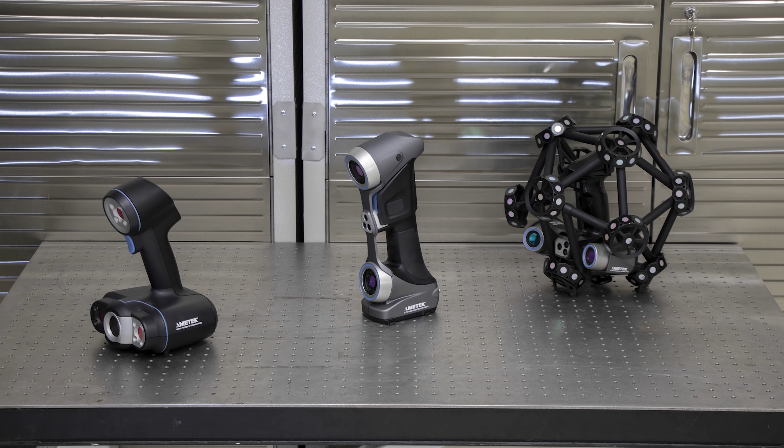In this video, we're going to take a look at choosing the right 3D scanner. There are many different 3D scanning technologies out there in many configurations and price points. We are going to take a look specifically at Creaform's handheld 3D scanning systems. Creaform introduced their first 3D scanner called the Handyscan back in 2005, and today has numerous handheld technologies. EMS has been selling and using Creaform 3D scanners since 2006.

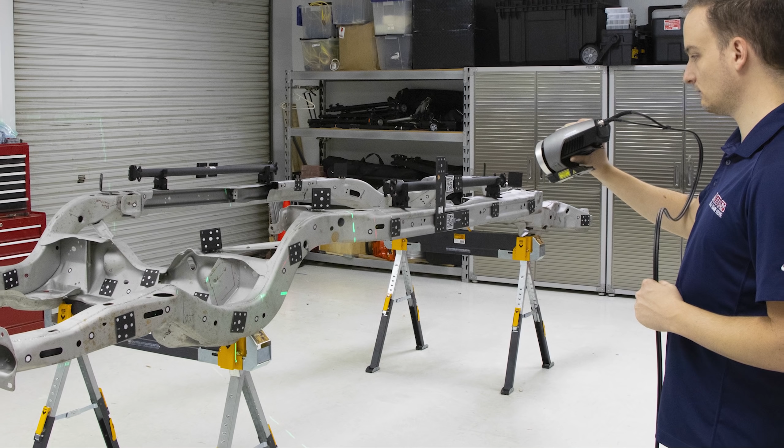The models we will look at today include the GoScan, the Handyscan, and the Metrascan. We will also talk about the MaxShot, which works with some of these 3D scanners. These models are offered in a few different configurations that we will discuss.

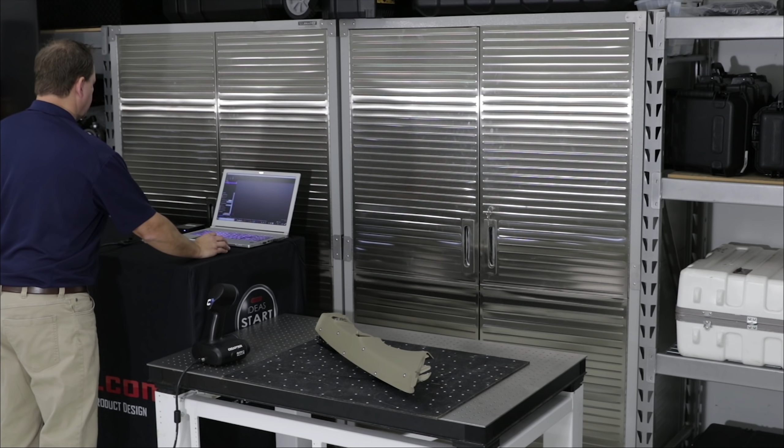So let's start by 3D scanning the same part with all three scanners to give you an idea of how they work and the differences between them. Starting with the GoScan. The GoScan is the entry-level commercial model offered by Creaform. The GoScan is what's called a structured light scanner, which projects a light pattern onto the object. This pattern is identified by the sensors to create the 3D shape.

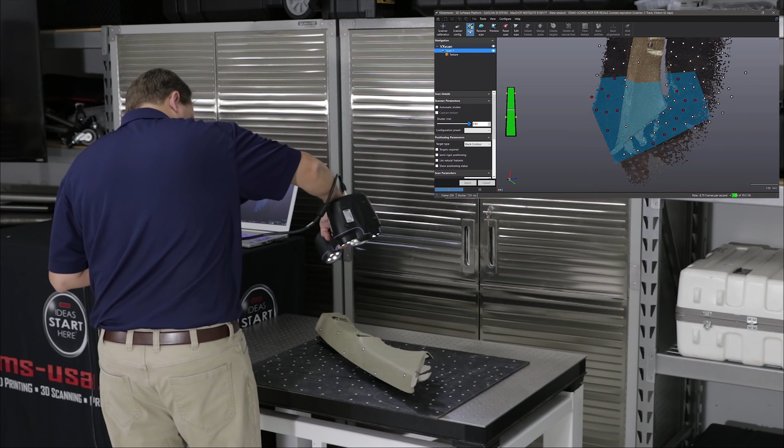It is offered in two configurations, the GoScan 20 and the GoScan 50. These scanners work the same way, and the key difference is in their 3D scanning volume and resolution. They offer pretty much the same accuracy, but the GoScan 20 is intended for smaller parts up to about 20 inches in size. The GoScan 50 can scan 3D objects that are much larger. Both scanners have the ability to capture 3D color for those applications where color and texture would be beneficial.

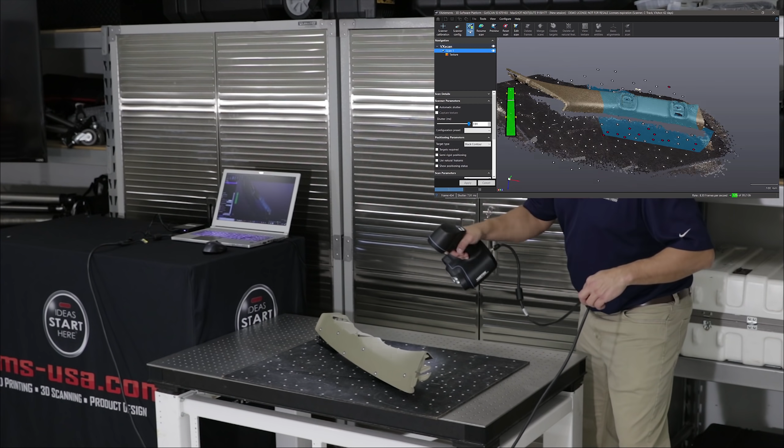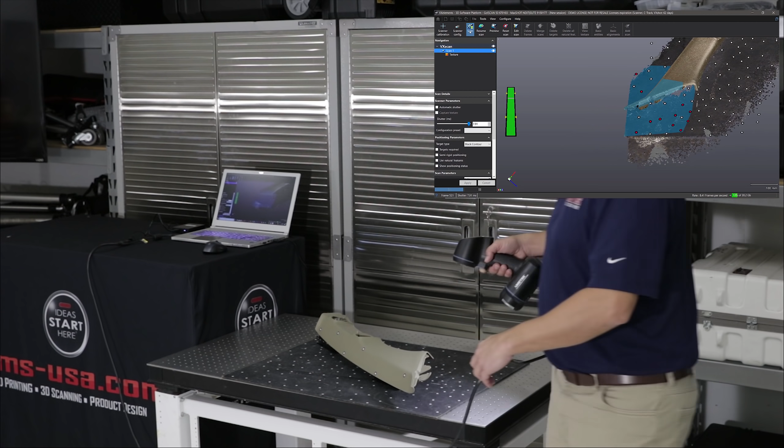The GoScan works with and without reflective targets. In many cases where you have a part with a lot of detail, targets are not required. However, if you were 3D scanning something that is not very descript, let's say like the side of a car, you would need targets. Now in this example, we're using targets both on the part, and you can see there's this targeted pad here on the table. Reason being, that just helps really lock down the scan as it moves along. A part like this would be difficult to scan without targets.

Now, what we're doing is we're flipping the part over now, and we're just using these little fixtures just to keep it off the table. That keeps any scan data picked up on the table separate from the part, which just makes it easier for editing later. Now, because the scanner had picked up the targets on the table as well as on the part, and because we're flipping the part over now, we need to delete those targets.

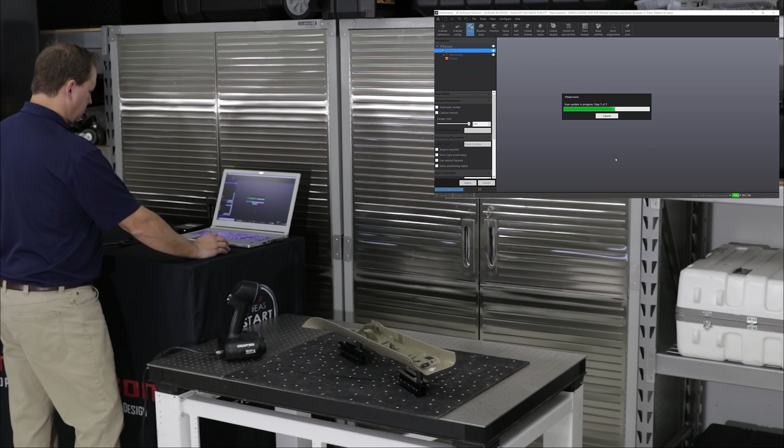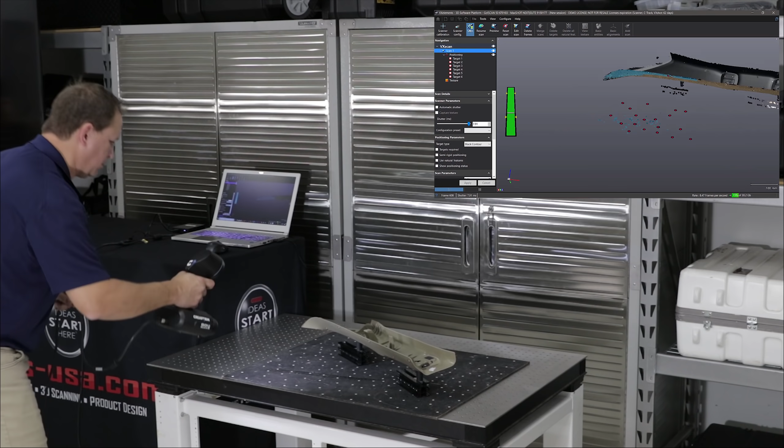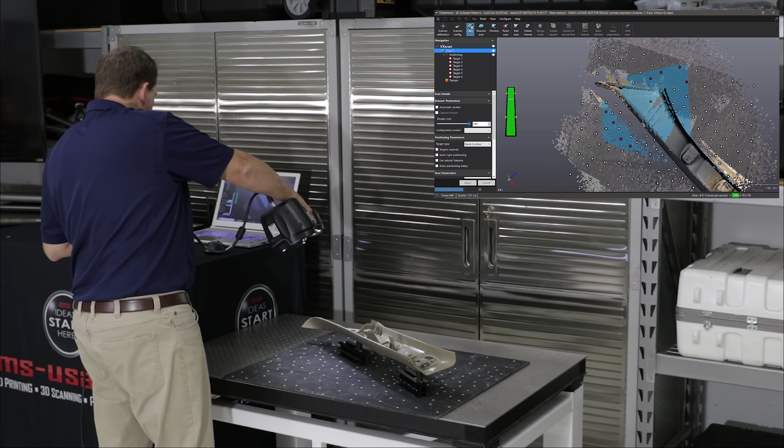And we have a few targets on the part that we will reacquire and then begin scanning again and pick the targets back up on the table. Because the relationship between the targets on the part and the targets there on the table has changed by flipping the part over, that's why we deleted them. And when we go to start scanning here again, we're going to basically just grab the targets on the part, and that will reacquire that orientation of those targets on the part. Then we'll go ahead and pick up the targets on the table itself and then continue scanning on the back side of the part.

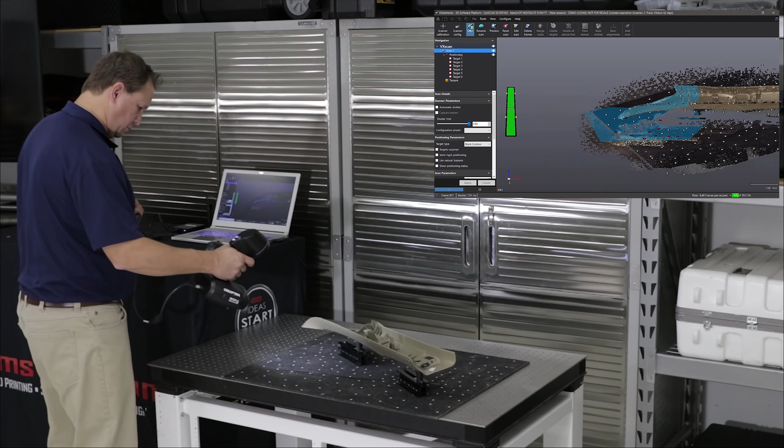The advantage of this is it basically allows us to scan it very quickly without having to put lots and lots of targets on the part. As long as those targets are in the field of view of the scanner, it will use them. The only downside to this is you can't move the part in relationship to the table without doing this process of deleting those targets off the table and then reacquiring the targets that are on the part.

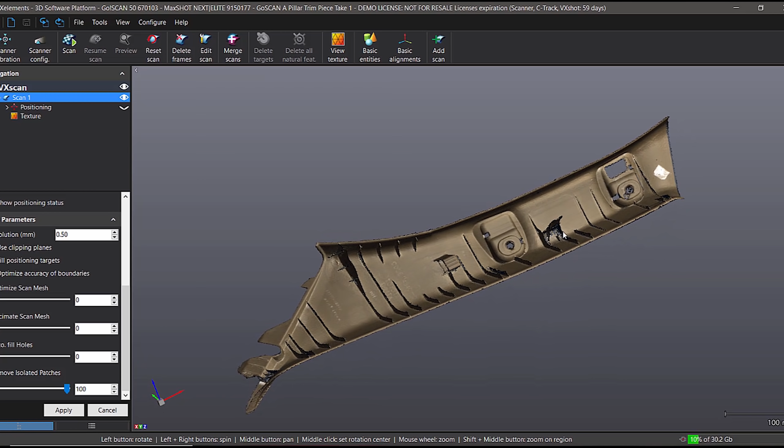Okay, here's the complete scan with the GoScan, and you can see it captures the color, and then the color turns off when I rotate and then comes back on. But you can see overall it did a pretty good job. There are going to be some small fine features where it just doesn't have the resolution that some of the other scanners may have, but overall a pretty good scan on this automotive trim piece here.

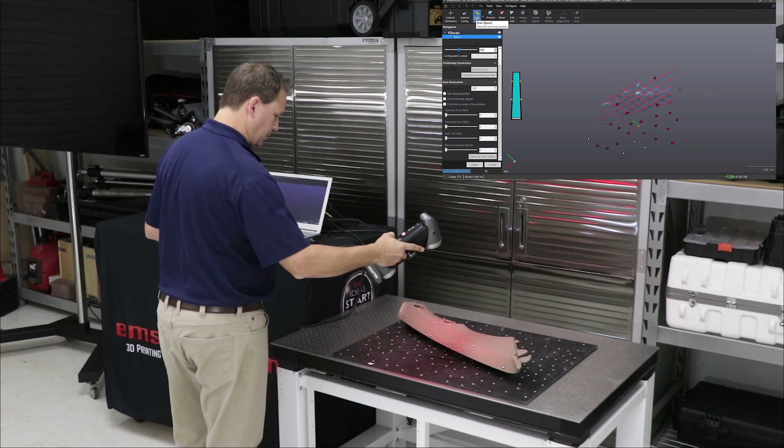Okay, so next let's go ahead and take a look at the Handyscan. Now the Handyscan looks fairly similar to the GoScan. The sensors or cameras are configured slightly different. The key difference is the Handyscan is a laser-based scanner, and it projects out either 6 or 14 laser lines depending on the model. You can see here we're doing 14 laser lines and we're moving across the part.

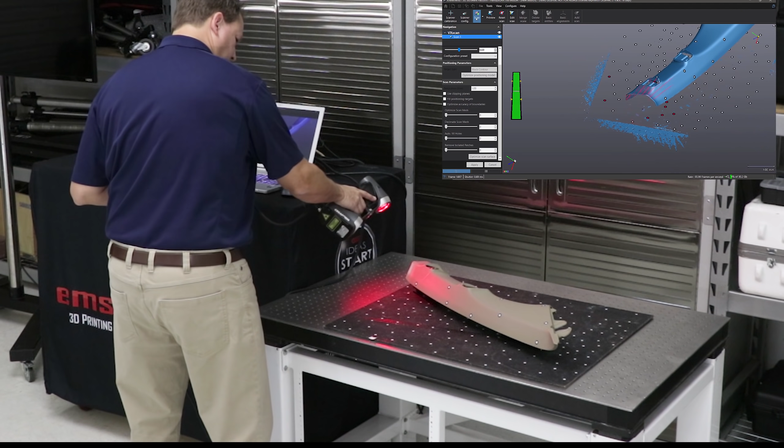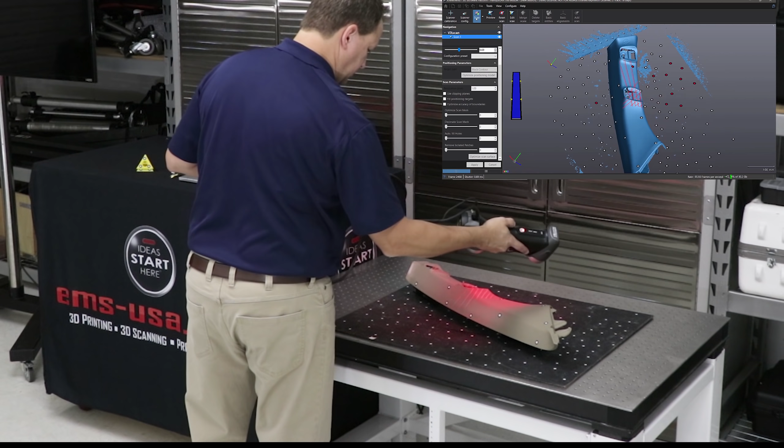Now, the Handyscan requires targets at all times. And again, those targets can be on the part, they can be around the part, or in this case, a combination of both. And we just move around and scan the part like we did with the GoScan, going back and forth. All these scanners are line of sight, so that's why having something very portable and easy to move around is very nice.

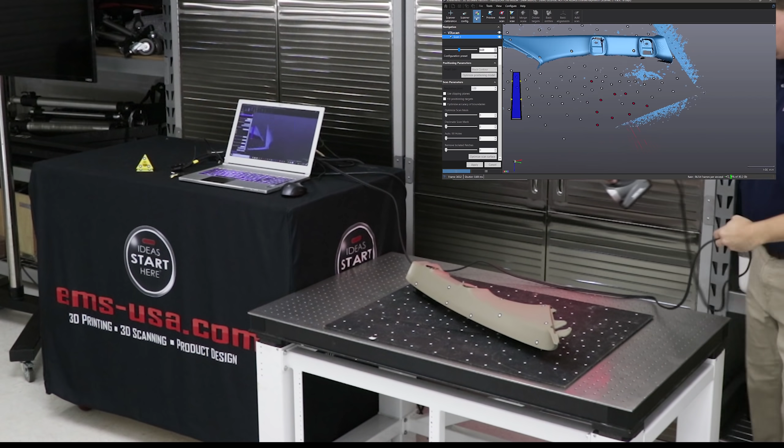Also, the Handyscan has a single line mode, as you see here, that allows you to get into small holes and crevices and get more resolution, more data down in there by orienting the single line in a different orientation and having the cameras focus in on that. And you can go back and forth from that single line mode back to the 14 or 6 line mode at any time as you're scanning. So again, it has to be able to see at least 3 targets at all times.

Now, the advantage of laser scanning over projected light is it does a much better job on dark and reflective surfaces. Basically, the way the lasers work and the return that comes back to the sensors is just better. So we can do higher resolution, we can get into higher accuracy, and we can scan more challenging parts with the Handyscan system.

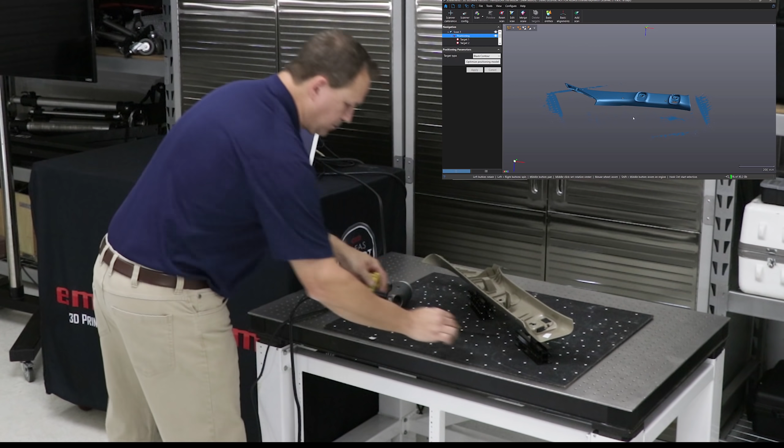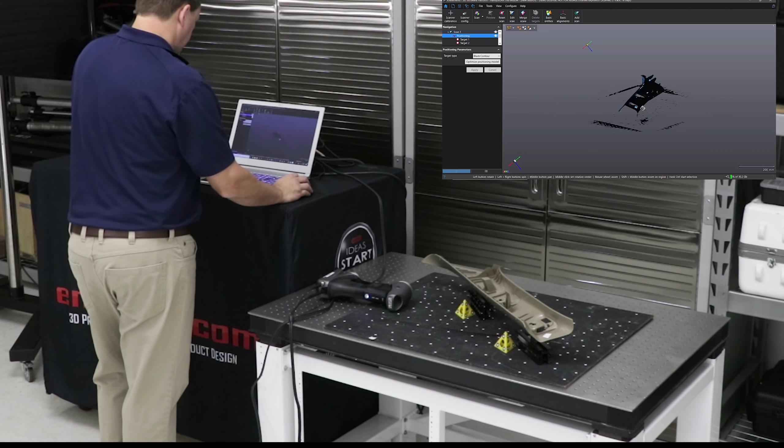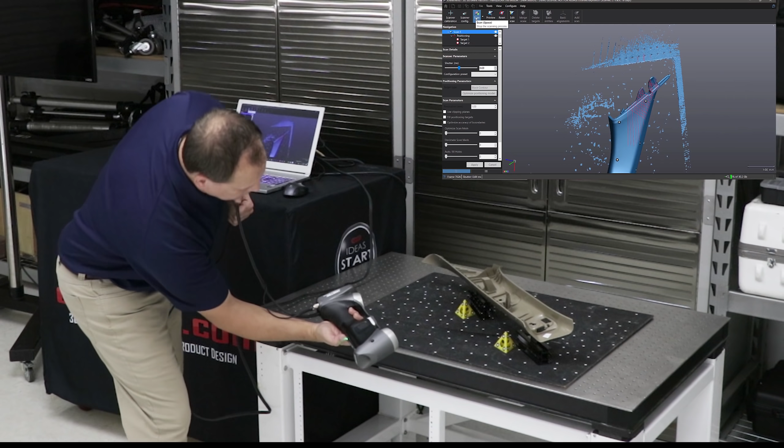So like the GoScan, we've now flipped the part over to get the other side, and in the software we went in and deleted all the targets on the table, and then we'll start over again. And I've also added a couple of artifacts with targets on them. I just call these vertical helpers. They just help me as I lean over and get the vertical side of the part. Just gives it a few more targets to see.

But once again, we acquire the targets on the part that we had left, and then we scan the table to pick up all of those targets, kind of reacquire all of those in relationship to the targets we had left on the part, and then again we just start working our way across the part.

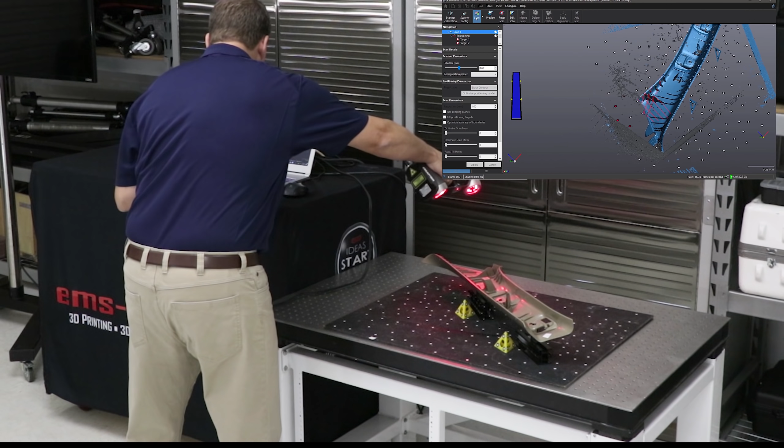Again, all scanners are line of sight, and what's nice about a handheld scanner, especially on this back side where we have a lot of ribs, is I can quickly move back and forth to get all of the different sides. This part is a very challenging part because of the shape and all the fine features; because it's thin-walled with sharp corners is why we chose this part. This is, again, a very challenging part to scan.

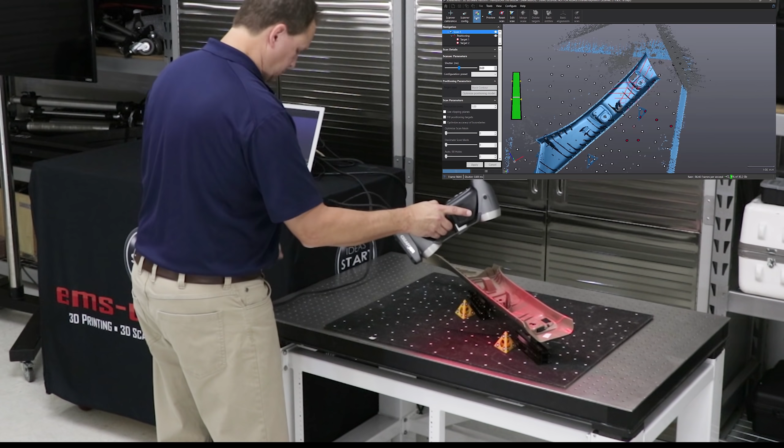And you can see we're able to scan this part with both the GoScan and the Handyscan within a matter of a few minutes. We don't need any hard tooling or fixturing. We just simply put it on the table here, work our way around, and scan it.

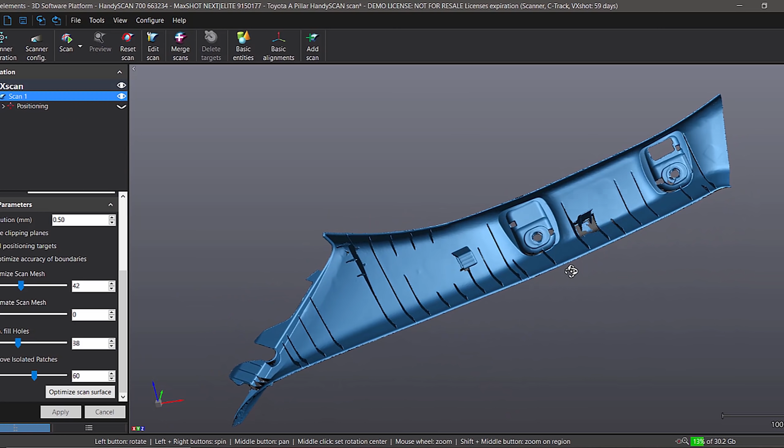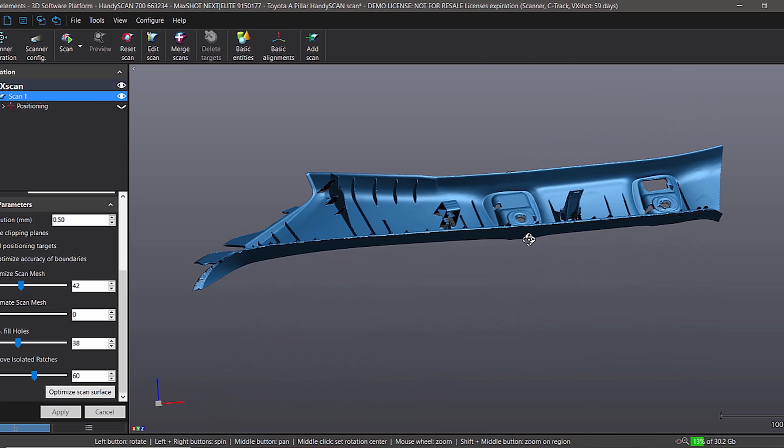Okay, so here is the finished part for the Handyscan. And as you can see here, the part looks really good, very high quality. If you look at the rib areas, very detailed. Really nice looking part. And you would expect that, being that the Handyscan offers higher resolution and higher accuracy than the GoScan. So again, very nice looking part. In a matter of minutes, we have 3D scanned this and got very nice detail.

Okay, so next we're going to take a look at the MetraSCAN. Now, the MetraSCAN is also a laser-based scanner like the Handyscan, and has the option of the 6 or 14 laser lines. It also has the single line mode. But where it's different from the Handyscan is there's no targets required. It'll actually scan in 2 different modes, a mode called static mode and a mode called dynamic mode. And we'll talk about each one.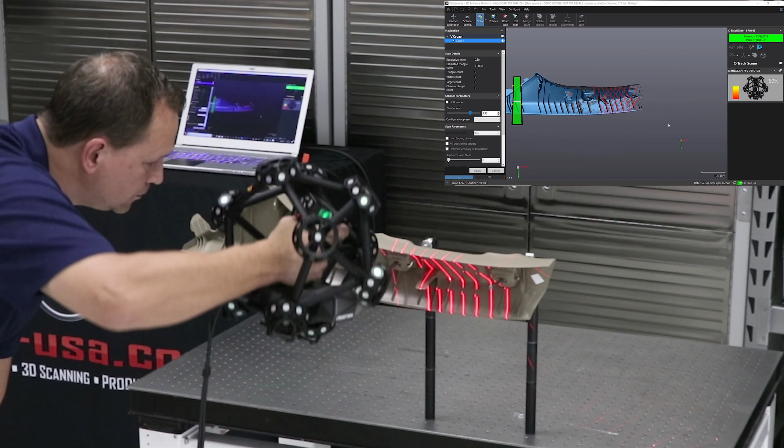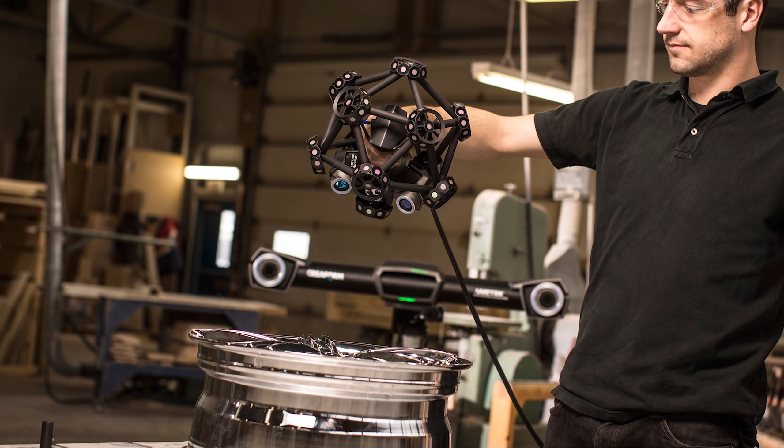Right now, what we've done is we've set the part up in a way that we can work all the way around the part, basically 360 degrees, and we're in what's called static mode, which means we can't move the part in this case, okay? So there's the camera system, what we call the C-Track, and instead of looking at targets on the part, in this case, it's actually looking at the targets on the head.

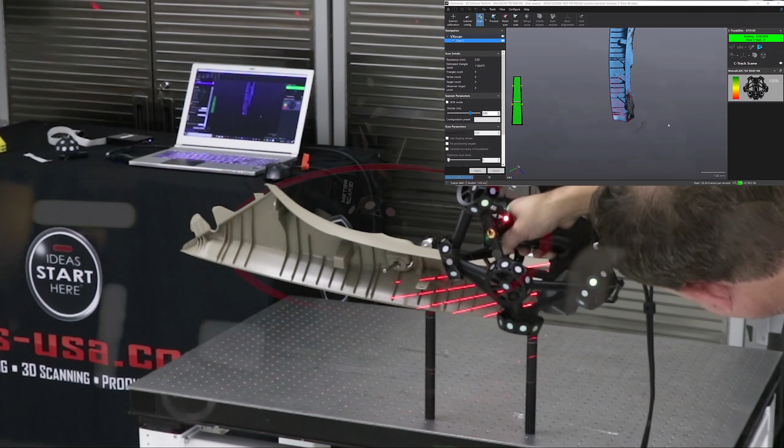So essentially what a Metrascan is, is a smaller size Handyscan with this sphere wrapped around it with all of these targets on it. So that camera system is actually tracking those targets, and then the scanner itself is scanning the part like the Handyscan was. So the advantage of this is you can pretty much set up and scan.

Now, we didn't necessarily have to lift the part up like this. We could have just set the part on the table, scanned one side of it, and then saved that. Started a new scan, scanned that, and then done a geometry alignment and aligned the two sets of data. And that's fine, but if it's easy enough to fixture the part in a way where I can get all the way around it, then in a single setup, as you can see here, I'm just going to work all the way around that part.

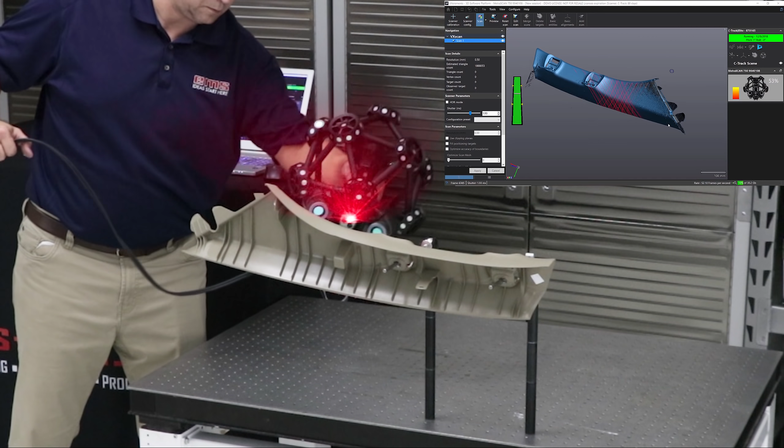And as long as the C-track system can see that scan head, we can scan the part. So that's one of the real advantages of the Metrascan system. Now, it also has an option called dynamic referencing. And what that does is it uses targets similar to the Handyscan, but they're larger targets. And that's how it identifies those targets from the targets on the actual scan head. So the targets are physically larger, and you could actually place those on a part and scan the part.

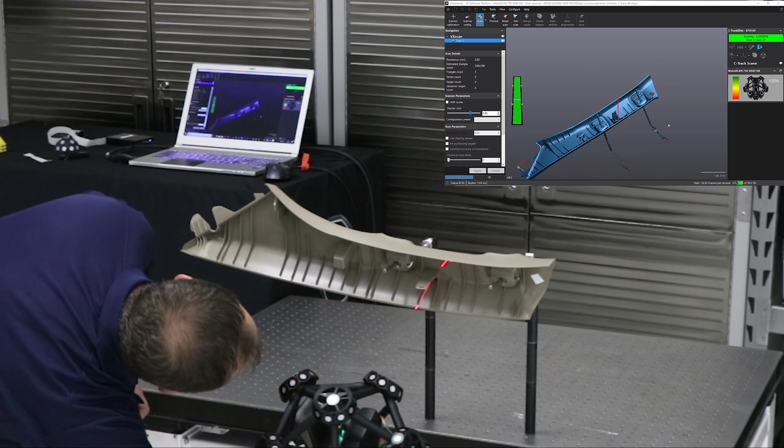The advantage of that is then the part can move. And that becomes very handy when you're scanning something very large, let's say like an automobile or something like that. You can put about 20 of those targets on the part, and whether it's the vehicle or the part, it could actually move around, or you can actually move that C-track system around. So it lets you scan very large parts fairly seamlessly, and you don't have to worry about noise and vibration. So that's really good for shop floor programming.

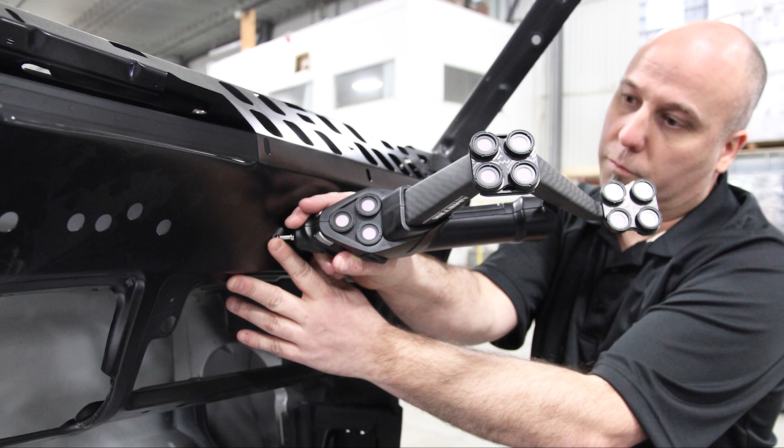The other thing the Metrascan system has as an option is a probing system. So think of a CMM, right? So a physical probe. And probing is really good for holes, for small fine features, areas that maybe the scanner has a hard time getting into. Thin-walled parts that have holes like sheet metal, that's where probing is very good.

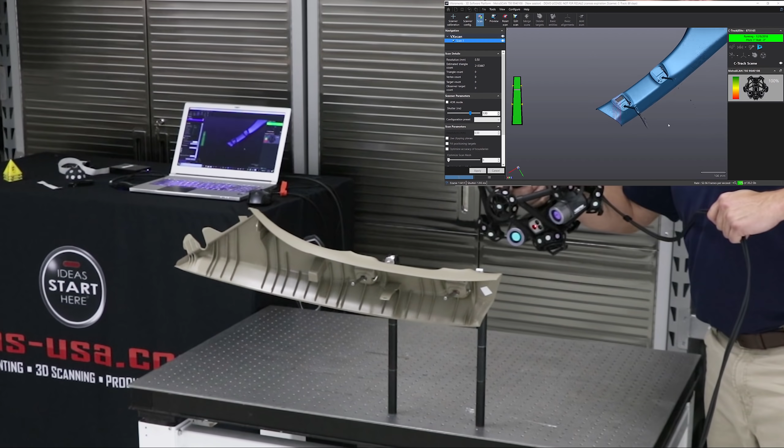So the Metrascan is somewhat similar to the Handyscan in the sense that it uses the same basic scanning technology, but how it works is fundamentally different, with the C-track system basically tracking the whole scanner, and then the onboard scanner within that sphere is what's picking up the laser stripes to pick up the part shape. So you can use it on small parts like you can the Handyscan, but where it really shines is as the parts get larger, it'll hold better accuracy over distance. The part can move around, and you can still scan and not lose accuracy.

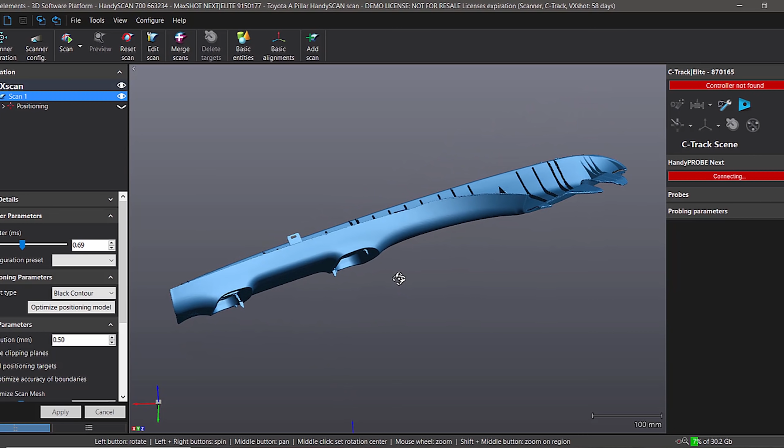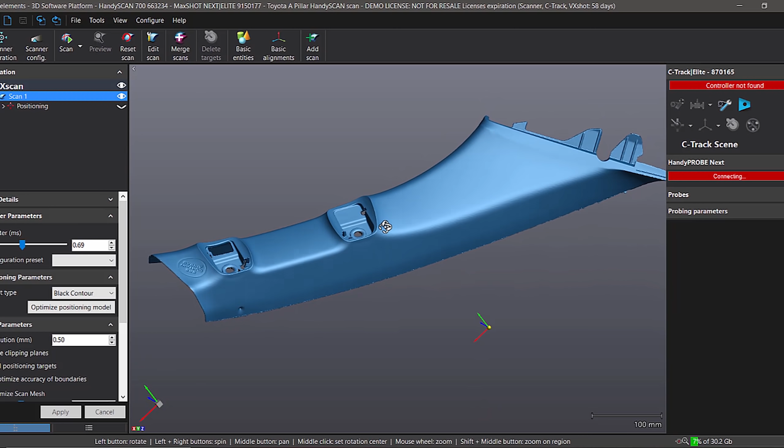Okay, if we take a look at the scan data now from the Metrascan 3D scanner, you're going to see it's very similar in quality to the Handyscan, because again, the Metrascan uses the same Handyscan technology as far as the lasers and the sensors. Obviously, how we track things is different, but given the same amount of time to scan the parts, going over them and getting all the areas, you should see the same quality. Where the Metrascan will improve on the Handyscan is in accuracy when you get on larger parts. But as far as just the look and the quality of it, it should be very similar.

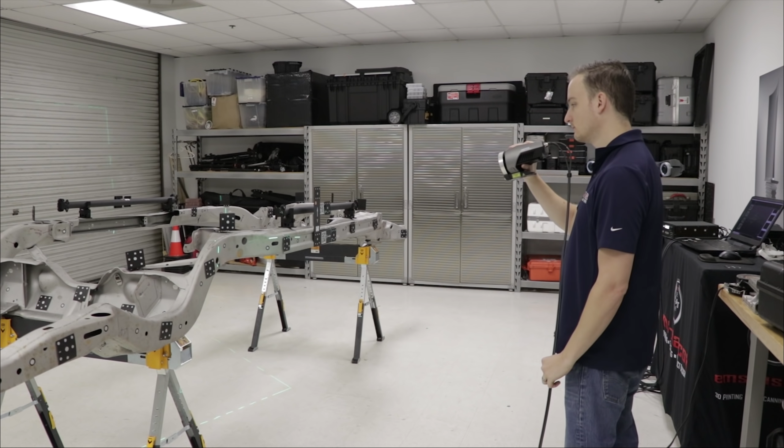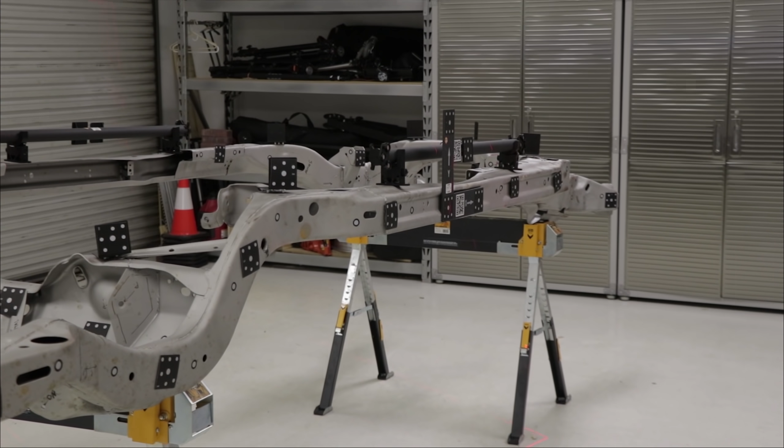Okay, so I mentioned the MaxSHOT at the beginning of this video. Now, we're not going to go into a lot of detail, but as you see here, this is a car frame, so it's a fairly large object. The problem with most scanners, whether it's the GoScan, the Handyscan, or even the Metrascan, is you're typically going to start at one end of the part and work your way down towards the other end. And what happens is you start to create what's called a stacking error. So the error that you get with the scanner increases over distance.

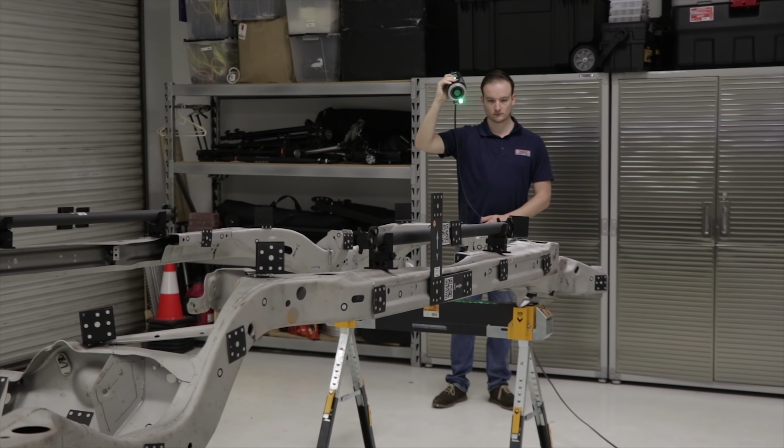And one of the ways to try to avoid that is using what's called a photogrammetry system, which is what the MaxSHOT is. You're basically taking a series of photographs with scale bars and other coded targets in the view, and you work your way around taking these photos, and then the software will go in and create a kind of master target file for you, so that as you scan over the entire part, you have a very accurate model.

So it's really used to increase accuracy over distance. So you can see here, after we've used the MaxSHOT, now we'll go back in with our MetraSCAN, and we have those dynamic reference targets on the part that were used during the photogrammetry, and we can scan the whole part very, very accurately.

Now, the MaxSHOT only works with the HandySCAN and the MetraSCAN. It does not work with the Go!SCAN. So that's something to keep in mind. Next, let's talk about applications and what are the typical applications for each scanner. Now, that doesn't necessarily mean you can't use one scanner for an application and another. But typically, customers will buy the scanner based on what their needs are.

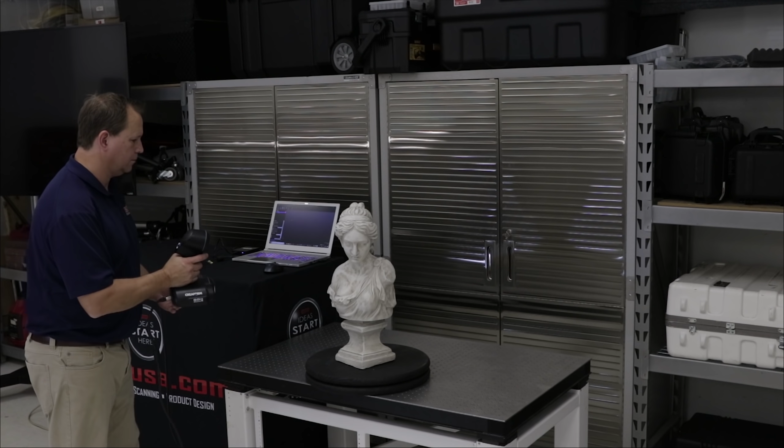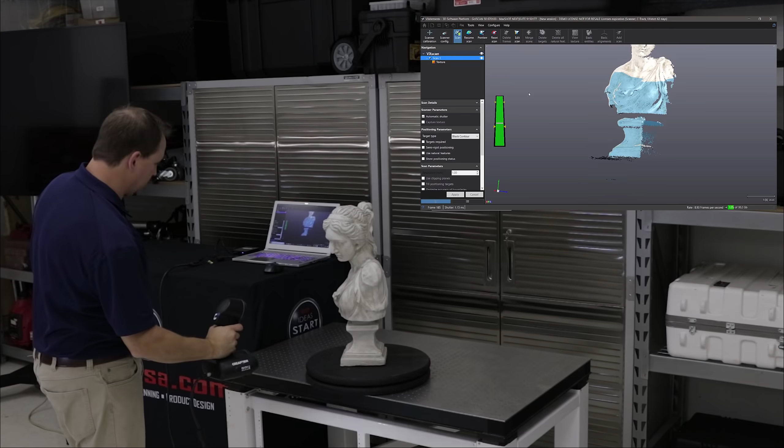Okay, so looking at applications for the Go!SCAN, things like art and sculpture are a really good fit for this scanner for a few reasons. One, it doesn't require any targets, and if you're doing something like sculpture, it has no trouble auto-aligning the data as you move along. Also, many times these things can be very valuable, and the customer may not want to have to put targets or anything else on it. So anything like art and sculpture is very good. Plus, it captures the color as a texture map.

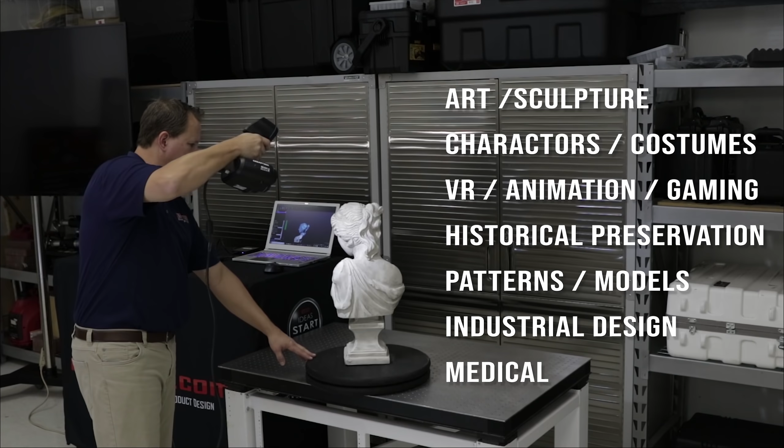And then things like characters and costumes is another good use. It's also used a lot in virtual reality, animation, and gaming, basically where they want to scan some stuff and have it in that environment. Historical preservation is another good use, similar to sculpture. They want to capture the color. They may not want to put targets or basically disturb it. It may be something very fragile, so that's a good use.

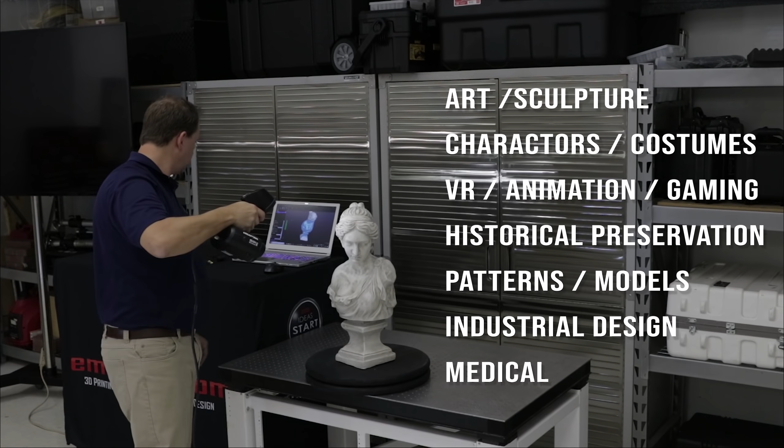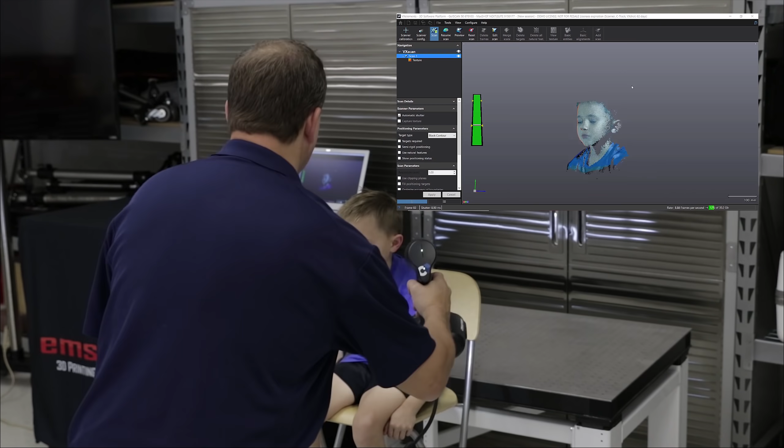Patterns and models is another good use, especially like vacuum forming or maybe a master pattern carved out of wood or clay or something like that, which a lot of times leads into industrial design. So anytime you're creating something by hand and then want to get it into a computer. And then medical is also a very good use for the Go!SCAN. A lot of people use it for prosthetics and many other applications where they want to be able to scan a part of a person's body. Also with the structured light, LED lights, it's very safe on the eyes. So those are the typical applications for the Go!SCAN.

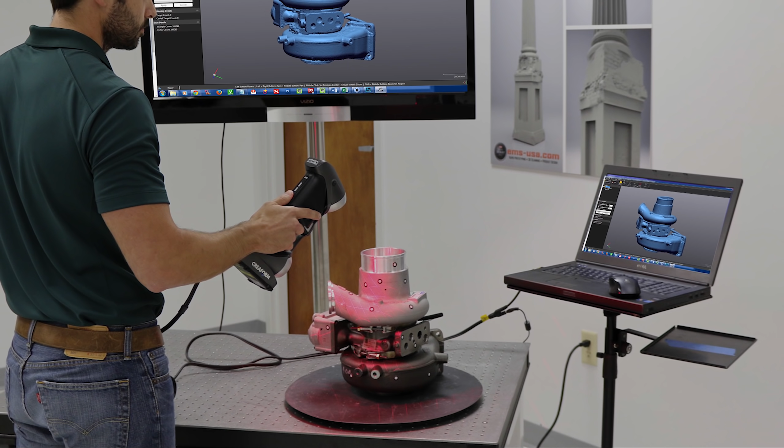Now moving on to the HandySCAN, applications that work really well for the HandySCAN are things where you need higher precision, and they may have more challenging surface types such as the dark and the shiny, and also where you need higher detail. So a lot of things like precision machine parts, plastic injection molded parts, a lot of automotive and aerospace items. Here you see the subframe of a vehicle. Here you see a turbocharger, things like that. It can also be used for inspection. So you basically can scan a part and then bring in the nominal CAD data and actually compare the two to see where they might be different.

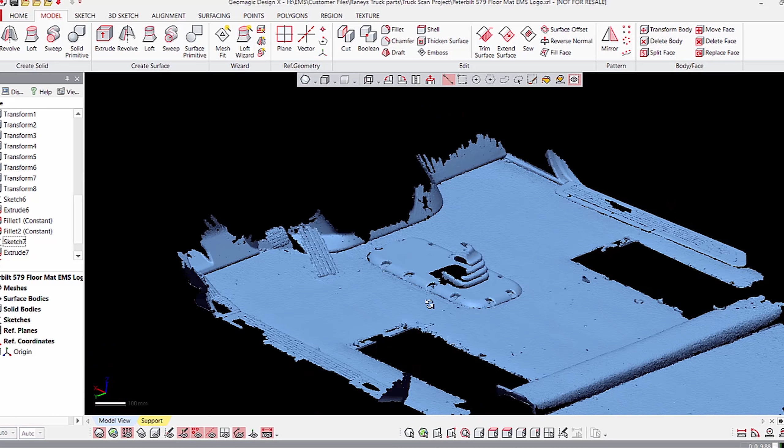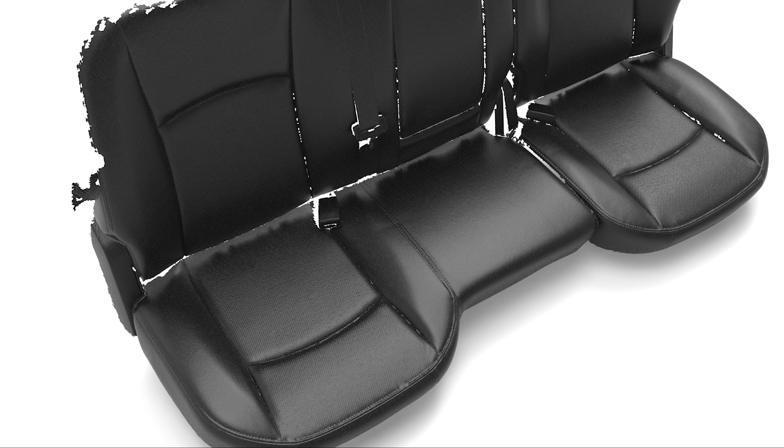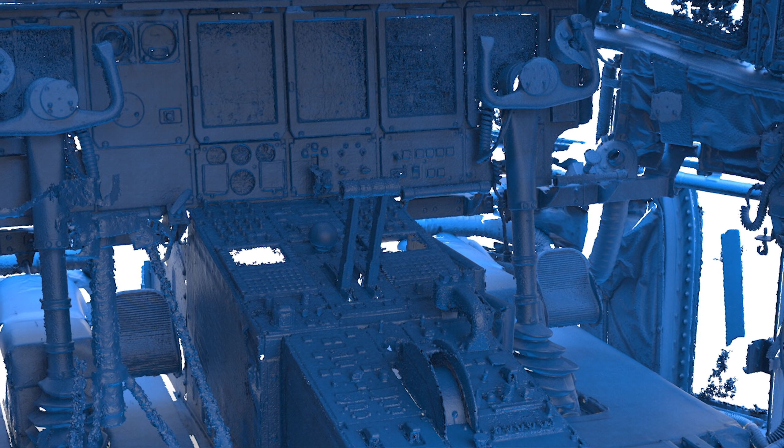Another really good use of the HandySCAN is getting into tight areas, tight locations, such as inside vehicles or aircraft cockpits. This allows you to get in there and scan everything from the floor to dashboards to seats for things like designing custom fit floor mats. You may want to be able to design car seat covers, dash covers, any kind of aftermarket accessories inside a vehicle. Or as you can see here, we've scanned an entire cockpit of an aircraft for possibly designing things like a flight simulator or trainer. So anytime you want to get into tight areas, the HandySCAN is very portable, easy to go in, scans the dark, the shiny, things like that to give you high quality scan data.

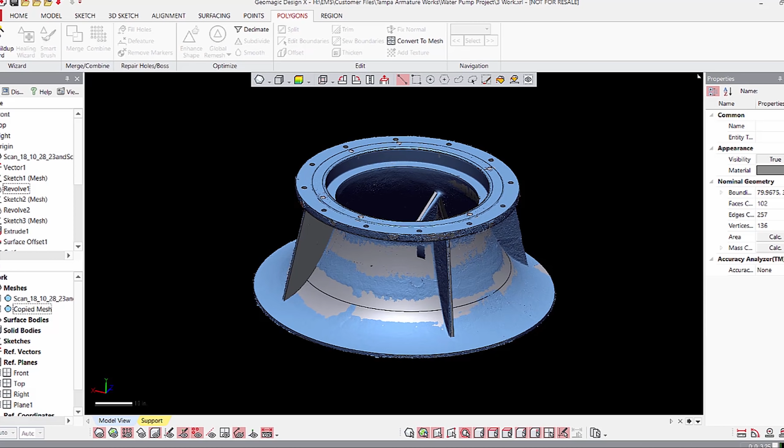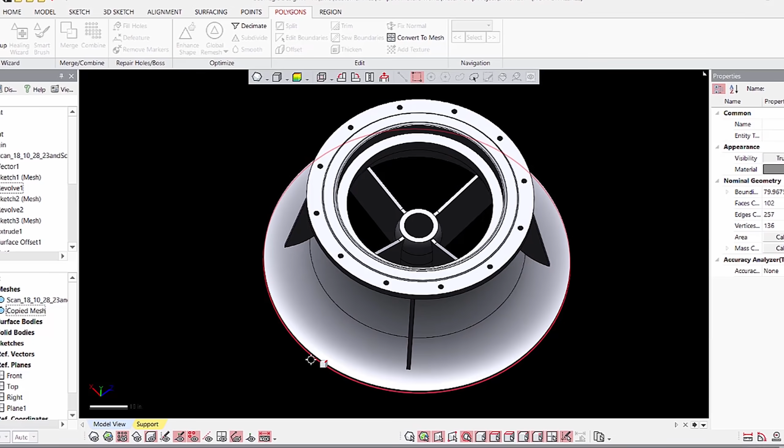Another good fit for the HandySCAN are large, heavy industrial items like pumps and impellers and housings, diffusers, things like that. Something where you need the flexibility to go out on the shop floor and be able to quickly scan and create the scan data from that object, many times for then doing reverse engineering and turning that into a full-blown CAD model. But have the ability to go out on the shop floor, and you can see with this item being able to reach in and scan all the internal geometry is very beneficial with the HandySCAN, because again of its portability, its small size. It's going to allow you to scan some pretty large objects, but at the same time get into any internal areas and be able to scan them.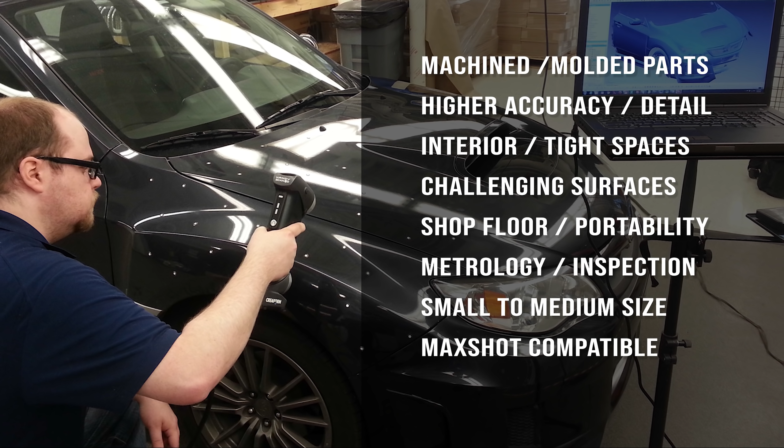So just to summarize what applications work well for the Handyscan, it's going to be where you're going to have more challenging parts or higher accuracy than the GoScan can offer. So things like precision machine parts, injection molded parts that have fine features or require higher accuracy and detail, interiors of vehicles and other tight spaces where you might have challenging surfaces, shiny, dark, or again require a higher accuracy. It can also be used for metrology and inspection, and really works well on small to medium sized parts.

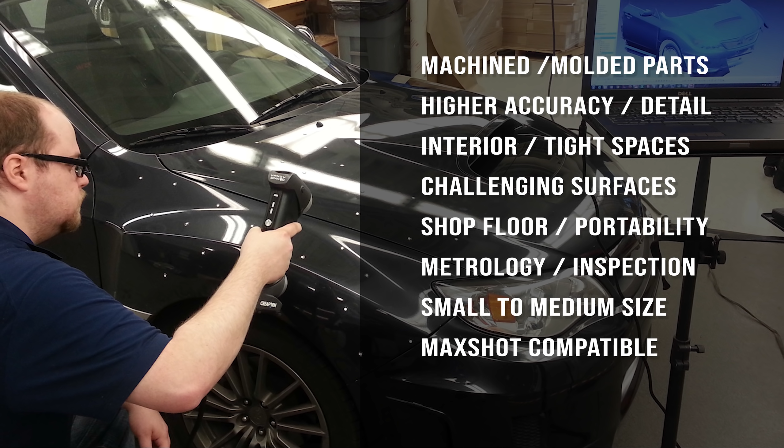Although you can do large stuff like a whole vehicle. Having the MaxSHOT as an add-on will help keep that accuracy high over long distances. So it's really the next step up from the GoScan when you're really looking for a higher level of detail and accuracy.

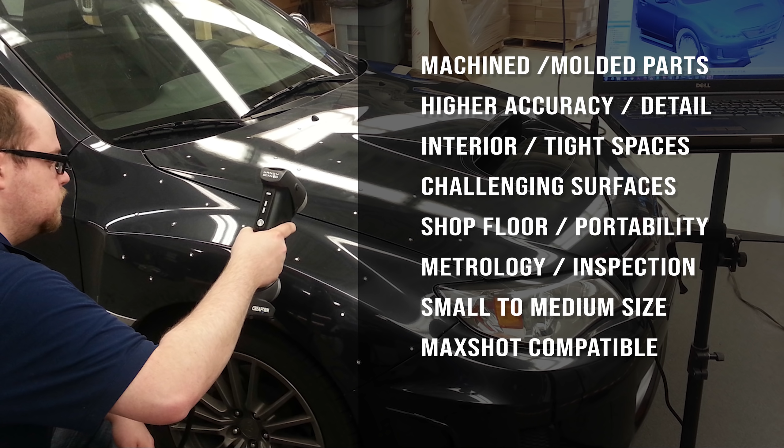Okay, finally, let's go ahead and take a look at applications for the MetraSCAN. Now, again, the MetraSCAN uses these dynamic reference targets that allow you to track the part while you're scanning and at the same time track the scan head. So this is great in a shop floor environment where you might have harsh conditions such as vibration and movement. It's very hard to lock down, especially some large objects like you see here. So that camera system, again, is tracking those targets on the part and tracking the head.

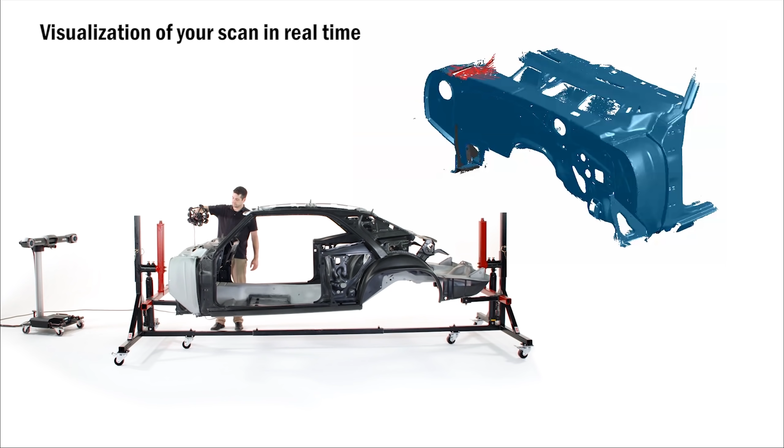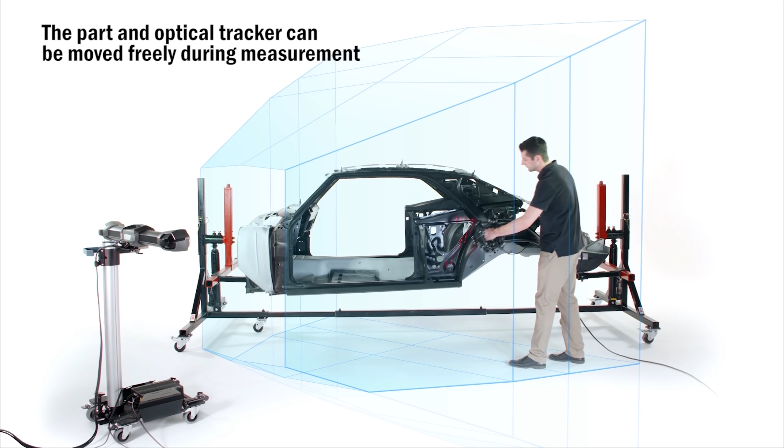And this allows you to move that C-Track around to different locations because it does require line of sight, but it'll allow you to very accurately scan a large object. And as you see here, it's got a very large scan volume. And when you get to an area where you can't see it anymore, you can just move it around. So it's very handy and makes it very fast to be able to scan an entire vehicle as you see here.

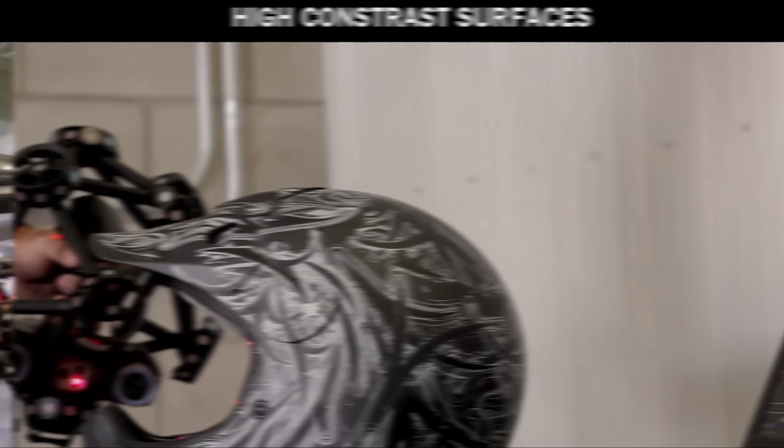Now, like the Handyscan, the MetraSCAN does very well on dark and shiny surfaces, but really takes it to another level. It will allow you to not only do dark and shiny, but it'll do contrasting surfaces where you have bright and dark because of a feature it has called HDR mode, and that allows the system to switch back and forth to scan those surface types. In addition, it'll do things like pure chrome, highly reflective, that the Handyscan wouldn't be able to do without some kind of surface spray treatment. It will scan it with no treatment whatsoever.

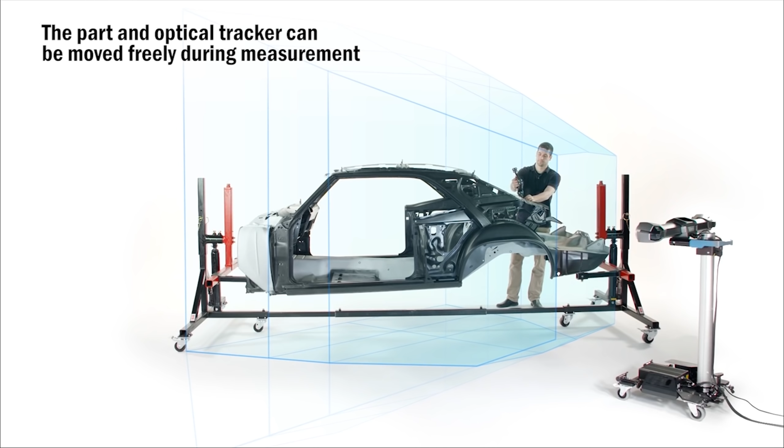With the optional HandyPROBE, you can do shop floor inspection of small to large parts by using this probing system to check features like holes, cylinders, planes, and other features to generate inspection reports. And with the dynamic referencing and the large scan volume, you can do very large parts quickly by being able to move that C-Track around to do your inspection.

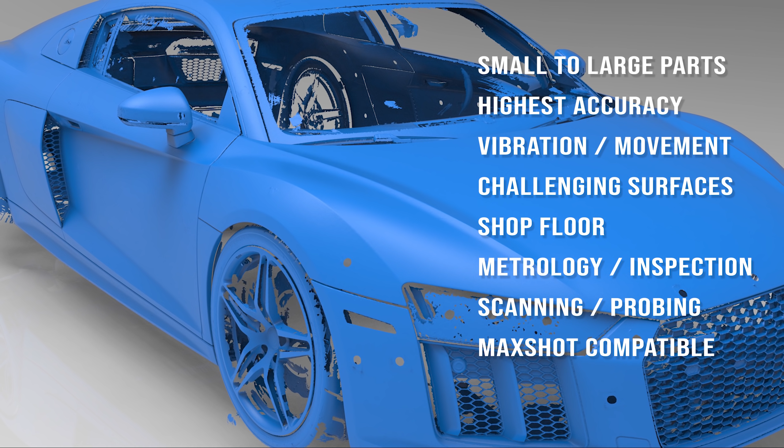So the applications for the MetraSCAN include small to large parts, where you need the highest accuracy, especially as the parts get larger over distance, and you can use it also with that MaxSHOT for even higher accuracy. Also in conditions on the shop floor where you have vibration or you need the ability to move the part around or that C-Track system. And of course, challenging surfaces, dark and shiny, can be scanned with no treatment whatsoever, including chrome.

And a lot of metrology and inspection applications are done with the MetraSCAN. It gives you the ability to 3D scan and probe all in one system. And as I mentioned, it works with the MaxSHOT system.

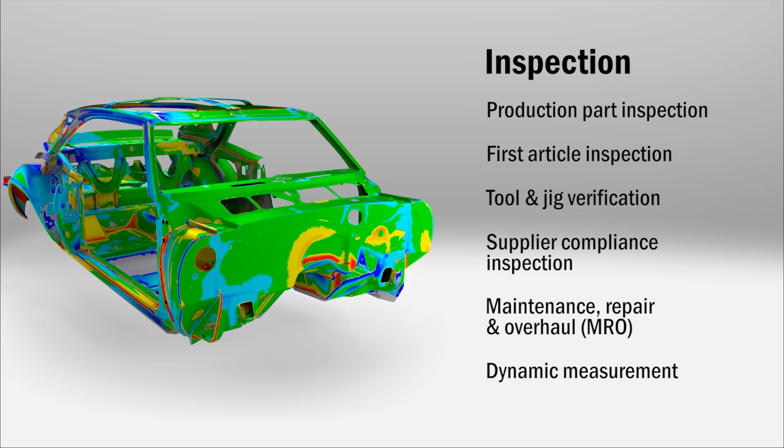So how do you choose the right 3D scanner? Well, really, you need to take a look closely at what your applications are and what it is you're trying to do. Are you trying to do just reverse engineering? Do you also want or need to do inspection? What are the accuracy requirements that you need? What size parts are you typically scanning? What is the surface finish of those parts?

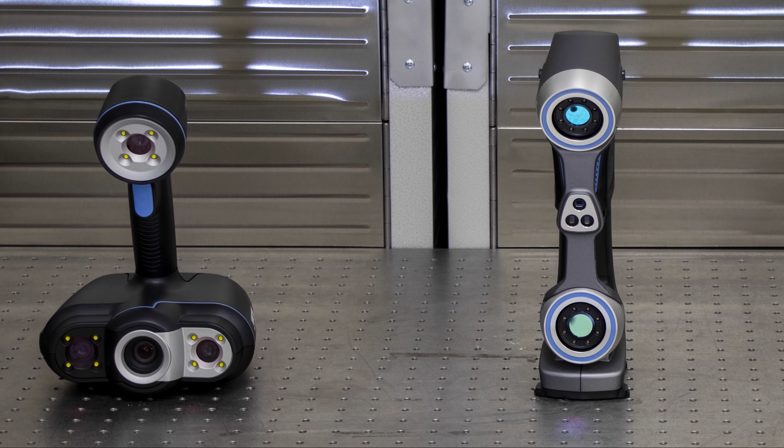Are you ever getting into very tight spaces? What about portability of the system? Do you need to be able to use it inside and outside? Is laser versus projected light important to you? Those are all the things that you need to think about when you're trying to choose the right 3D scanner.